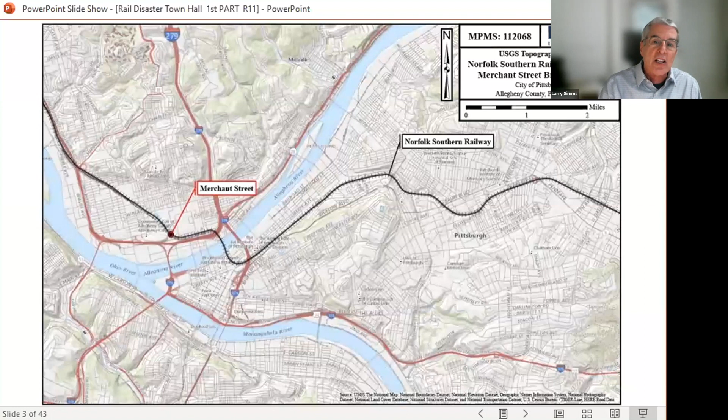Let's look at a rail bridge on the North Shore where the tracks pass over Merchant Street at the southwest corner of Allegheny Commons. The bridge dates from 1905 and was the first bridge in Norfolk Southern's PVCP, the Pittsburgh Vertical Clearance Project, to be rebuilt, completed last year.

This is how the bridge looks today. Here's how it looked 2 years ago.

Remember, this is the Vertical Clearance Project. So an important detail is that the tracks are above the road. There was never a constraint here on railcar height. We've never understood why this was part of the PVCP or why it was implemented before the rest.

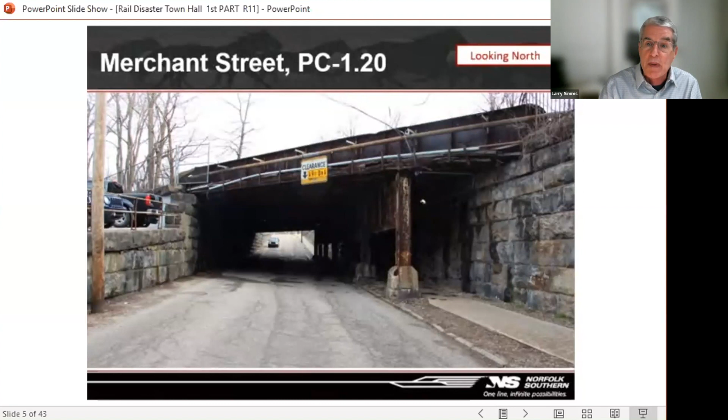In 2018, the railroad hired engineers to assess the bridge, as you see it here, and decide whether it could be saved or must be replaced. Their pictures show a steel structure in advanced decay.

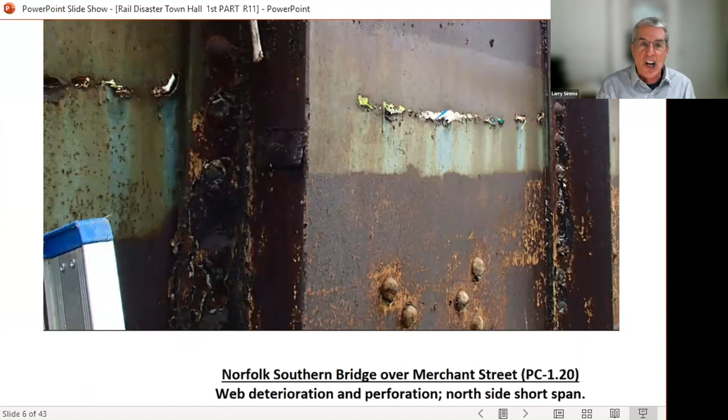The bright spots you see in the plate steel here are daylight shining through holes. This photo shows 100% section loss, which is technical talk for no metal here, can't support any load.

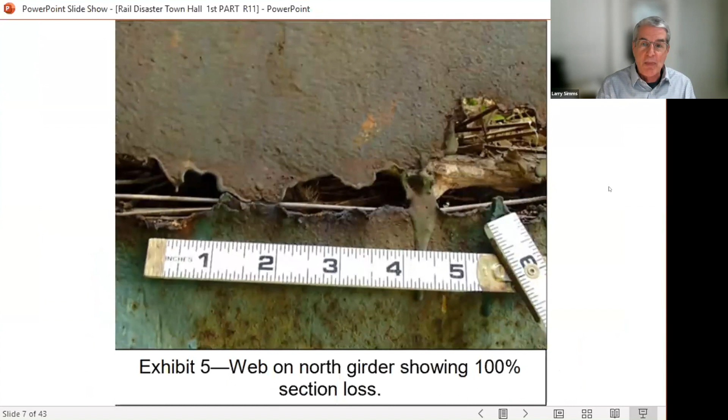When the engineers published their report, we were shocked to see one image in particular. It's not that we were surprised at the bridge condition. We visited the site, but the plain statement of what caused the serious damage was new to us.

It's directly attributed to an accident in 1934. Though neither the railroad nor the engineering company told us, this was no small incident. We've learned that a passenger train belonging to the long-gone Pennsylvania Railroad jumped the track, crashing into the Clark Bar factory and an apartment building below the bridge.

People died. Let's turn the clock back to February 26, 1934. You'll want to use to boost your volume for this clip.

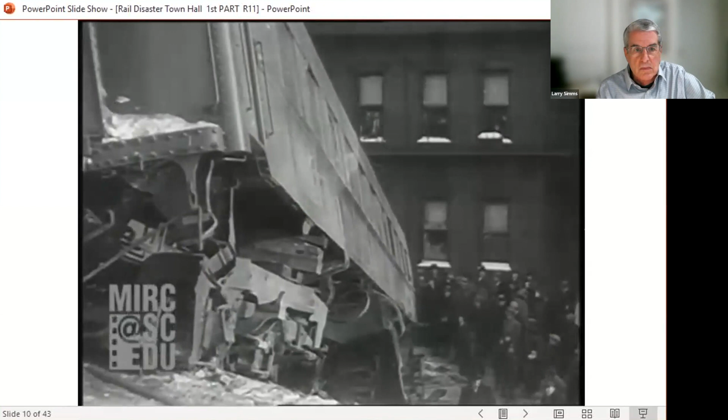Death rides the rail. Smashed cars tell a tragic story of the plunge of an express train from the Pittsburgh viaduct, taking 9 lives and injuring 37. One of the coaches tore into the side of the factory, while others landed near apartment houses, terrifying their occupants. The train, bound from Akron, was just entering the city at night when suddenly it jumped the track. This shows how passengers were crushed in their seats without warning. Only a few minutes away from the next station, their lives were snuffed out in a twinkling. In spite of every safeguard, fate took its toll.

Again, that's the very same bridge we've been looking at. This was national news. Nine died, forty were injured. We don't trivialize the loss of life, the horrific injuries, or the property damage.

Indeed, the potential for such calamity is why we're here. But the most important lesson for us today is that neither this railroad nor its successor, Norfolk Southern, ever saw fit to repair the structural damage, not even to paint the area to prevent further degradation. As we see throughout our region, rail infrastructure is typically allowed to deteriorate until it falls apart. Bridges needn't end this way.

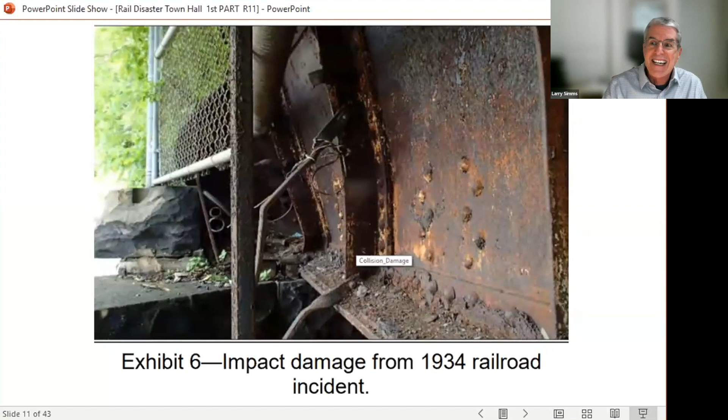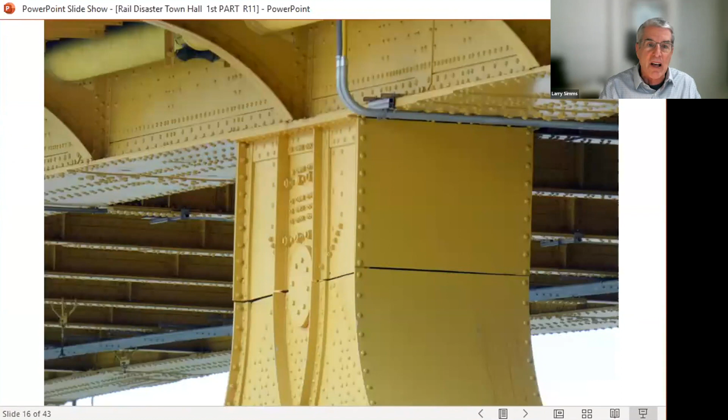We'll take a quick look at two. This is the McCullough Bridge. Most call it 16th Street. It's 99 years old, and the photos tell the story. The city maintains it well. There are no obvious signs of age or wear. It looks like it could easily go another 99 years. It's really in great shape.

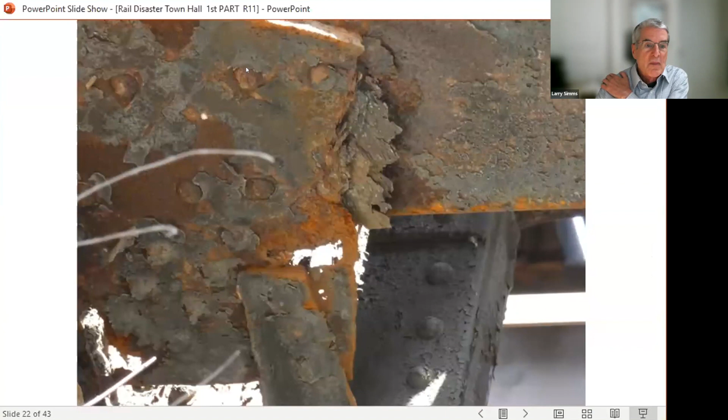There are two types of aging that concern me. The first is the structural steel itself. There are holes, which you can see here, flaking horizontal metal at the base of these beams retains water. It seeps into the cracks. There's little or no protective paint. There are holes at the top here, and holes at the bottom.

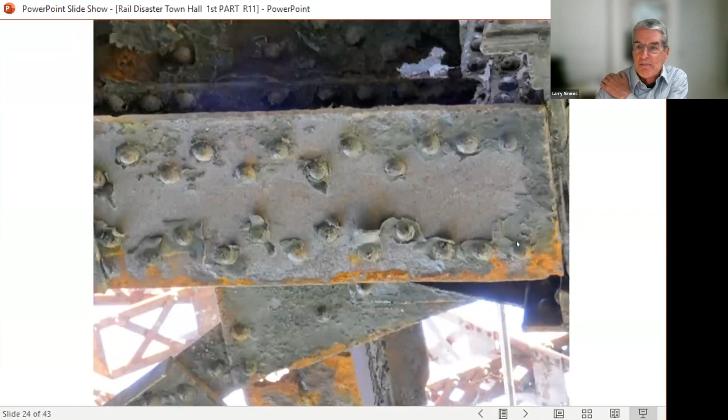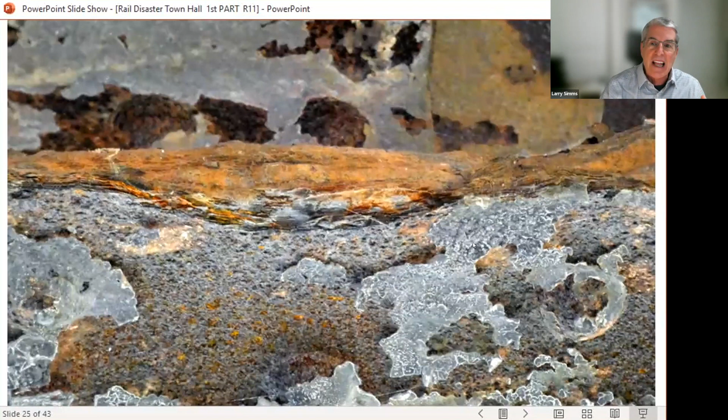This is the worst part. This is the bottom of a beam that has absorbed water, rusted, and it expands as it rusts. It flakes off and loses most of its strength. Some of the decrepit metal looks quite artistic, and these scenes are visible throughout the bridge.

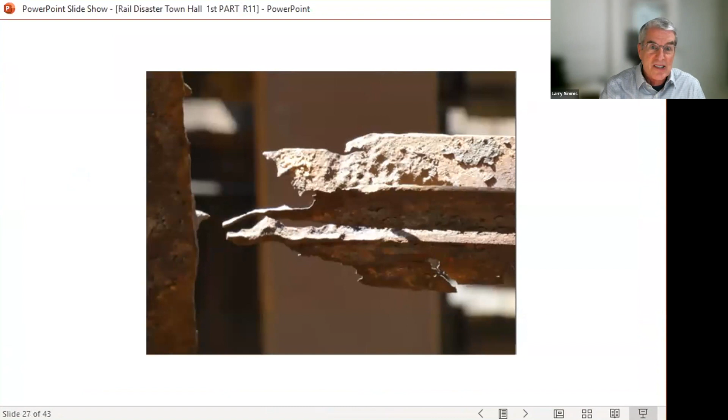This is one of the worst locations. It's directly opposite the convention center. The horizontal steel beams at the bottom of this concrete used to be straight. They're now sagging, and it looks like there's not much strength left in that structure.

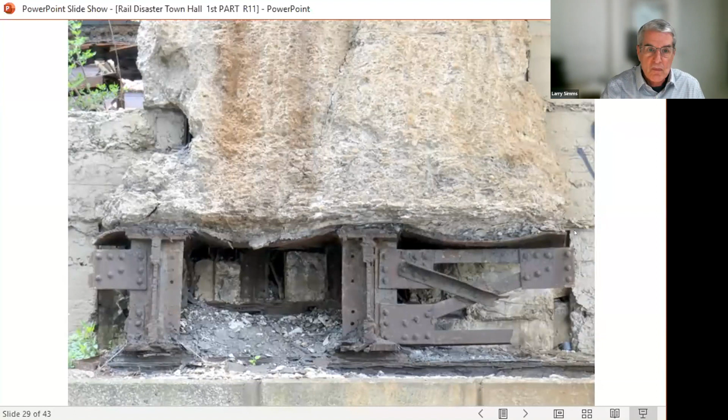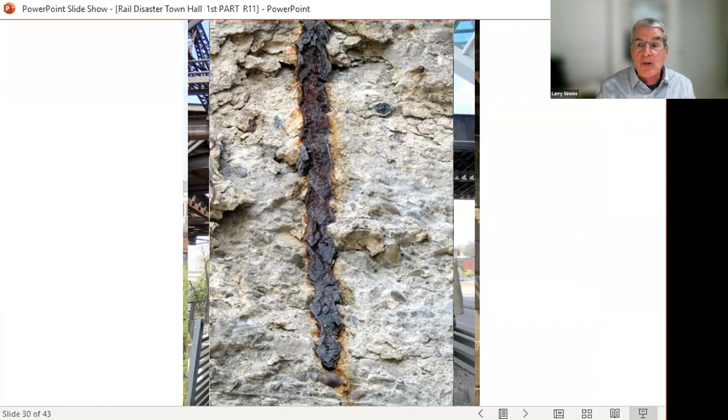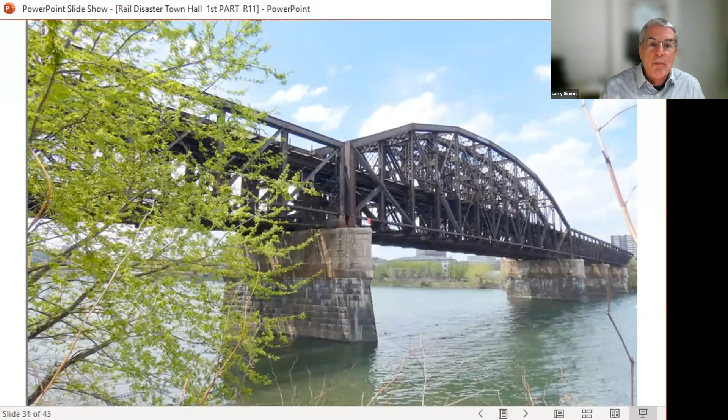The second problem is the concrete support piers. This is one where what used to be wrought iron rebar has disintegrated completely. The original stone piers were built in 1854 and are themselves fine, but the bridge was raised in 1918 by order of the War Department, lifted several feet to allow taller boats to pass. The concrete is in terrible condition. The rebar is just falling apart. There's nothing left. I wouldn't bet on this structure lasting beyond next week.

Back to Merchant Street. The engineers said what we expected them to say. We knew the railroad wanted to replace the bridge, not fix it. They cited extensive steel corrosion and said there were major safety concerns and risk to the traveling public, meaning people walking, cycling, and driving underneath. They also said current and future rail traffic depends on it. On the next page, they confess their real objective: to accommodate the expected substantial increase in freight demand for the next 25 years. Norfolk Southern wanted a new bridge to grow their business, and they wanted taxpayers to cover most of the cost. They needed it because they neglected the old one until it failed, yet the bill was handed to the public.

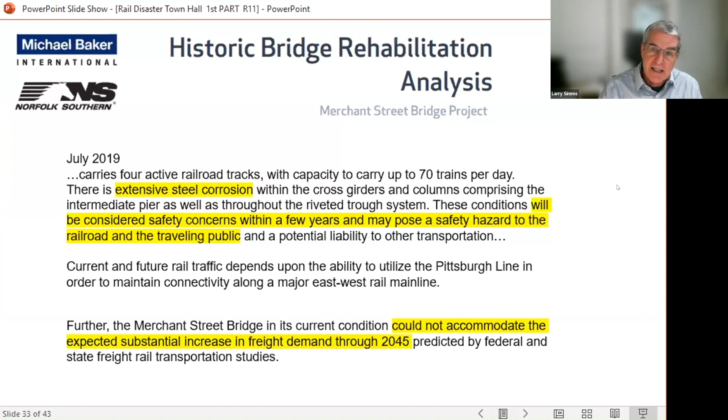One more point about maintenance. The engineers weighing repair versus replace argued that saving the bridge would mean taking care of it, like painting every 20 years, something the city always does and the railroad never does. I used to work for Rust-Oleum on the industrial side and climbed many water towers and walked many bridges, all made of steel. I never met a maintenance head who didn't understand that steel outdoors needs to be protected, or who was bothered by a 20-year painting cycle.

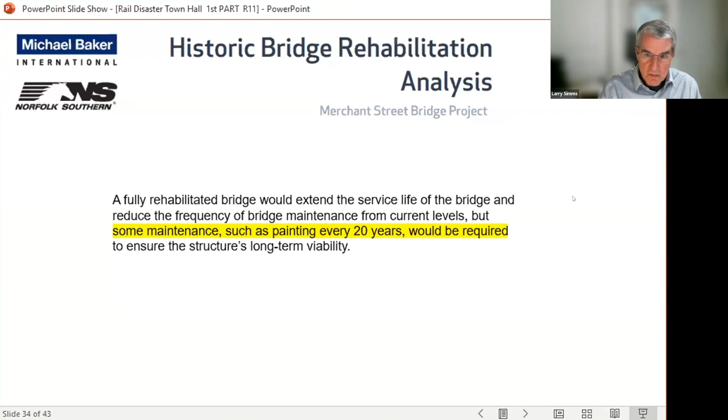I wondered whether Norfolk Southern has so little regard for our city and region that they don't care how decrepit they make us look. Here, the rusted hulk of the Fort Wayne Bridge, just a few feet from the gleaming convention center. The answer is yes. Just last week, a PBS NewsHour featured RP3 on rail safety and focused on Pittsburgh. Asked about maintenance, Norfolk Southern replied, 'Aesthetics do not determine structural integrity.'

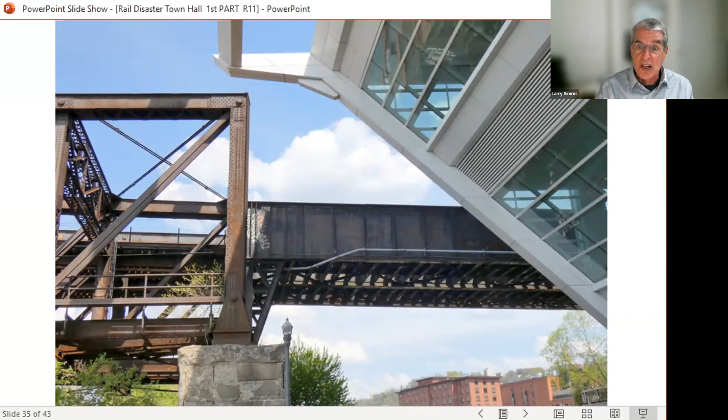So much for appearances. The rail bridges will never look as good as the city bridges. As for structural integrity, if and when Norfolk Southern shares engineering reports which establish and confirm reasonable safety margins, we'll back off this point. They've declined. The real reason the railroad wants to modify Pittsburgh bridges is to accommodate the expected substantial increase in freight demand through 2045.

To be clear, we understand all stakeholders signed off on the vertical clearance project and it's a done deal. That doesn't mean we think it was a good deal or understand why taxpayers funded improvements to make Norfolk Southern, with the existing height constraints, even more profitable.

Norfolk Southern made $1.1 billion profit last quarter alone. We're still allowed to make sure public monies are spent as intended.

We can still observe that the only thing taxpayers will reap from this forced investment are more pollution, more noise, and more risk of an East Palestine event. We can even note that a respected columnist recently called for Governor Shapiro to take back the taxpayer money.

Our reality is that the railroad will soon run more longer trains, taller and inherently less stable, right next to volatile oil trains on a zigzag route through our most densely populated neighborhoods, including the downtown business district and sports arenas.

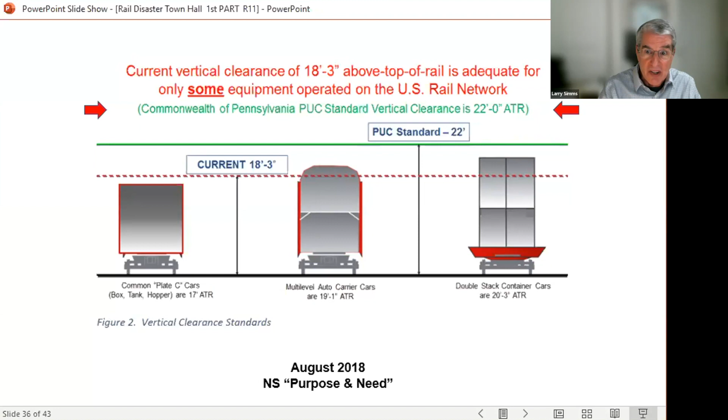We're allowed to continue working to maximize safety and minimize risk, and we'll do so.

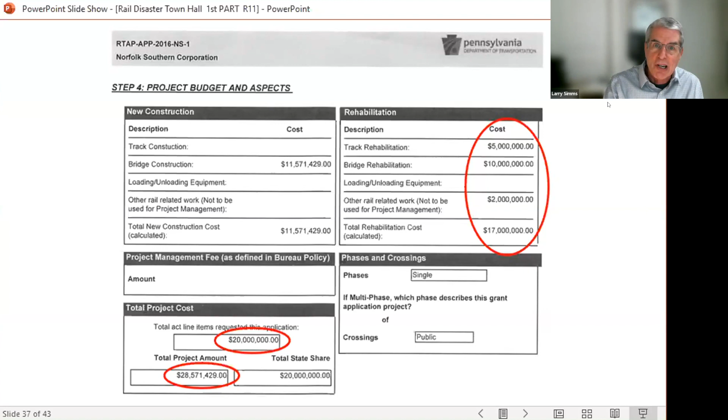$28,571,429 to Norfolk Southern, with $20 million from taxpayers.

My day job is in commercial construction. Half my customers are government agencies, and half those projects are for the Department of Defense. I routinely see bids on far larger, far more complex work. I personally believe this grant followed a different, backwards process.

Hypothetical conversation. Railroad: we'd like funding help on some construction. State: what's it going to cost? Railroad: how much have you got? State: 20 million. Railroad: we'll take it.

How else could a cost projection multiplied by 70% consistently yield a taxpayer share of $20 million to the penny, even as many component costs sharply change?

I don't suggest this was illegal or improper, but if I were Norfolk Southern, I'd sure use a different method. These construction costs are hard to accept at face value.

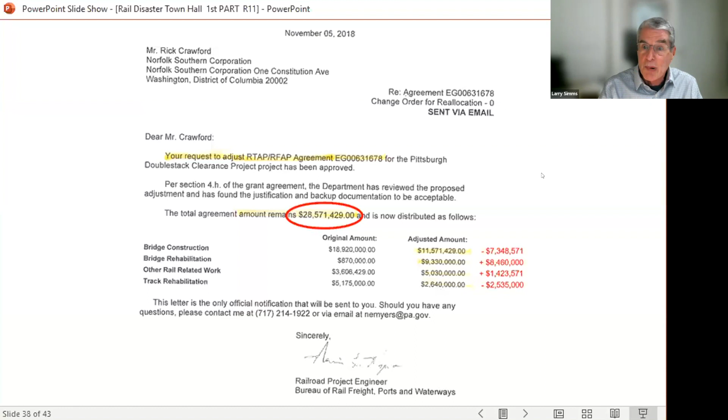That's money problem number one. Money problem number two isn't what you see here. The fact that the new bridge is called maintenance rather than new construction isn't of consequence. But remember that the Merchant Bridge is above the street and therefore has unlimited vertical clearance.

It did not constrain the railroad from running double-stack trains, which makes it impossible to use that argument to justify government funds. Taxpayers are simply buying Norfolk Southern a new bridge for $8.5 million.

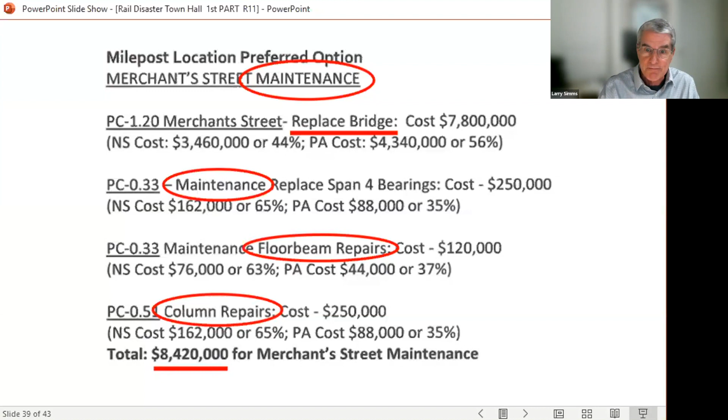Money problem number three. While oversimplified, Norfolk Southern's capital budgeting model looks like this to us. Step one, build a new bridge for $8.5 million, using Merchant Street as an example. Step two, collect a taxpayer subsidy of $5.9 million.

Step three, spend nothing on bridge maintenance for a very long time. 117 years is the actual life of Merchant Street. The net cost of over $20,000 per year is absurdly low.

But worse is steps 4 through 6: do it all again when the last bridge dies of neglect.

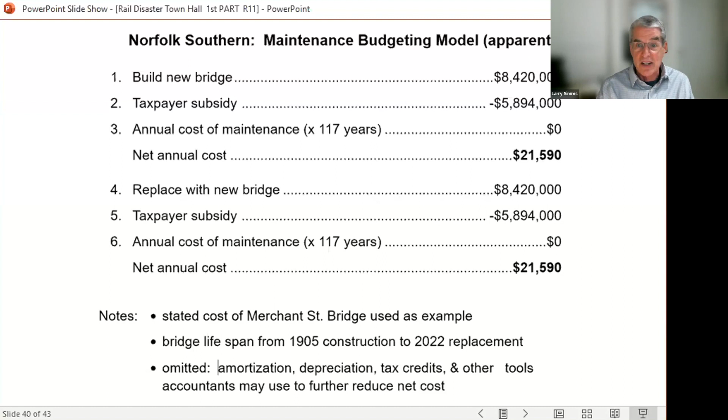The last money problem is that 2 of the approved projects were rejected by local government. The boroughs said no thanks to new structures which were little used, and to avoid future expense, simply told the railroad to demolish them.

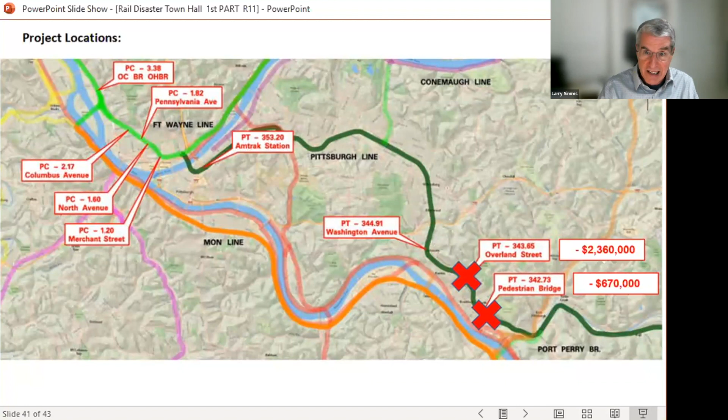Thank you. I'd like to focus on trust and Norfolk Southern's 6-point safety plan when I come back, but now have the pleasure of introducing Glenn Olcerst and Barbara Talerico, who founded RP3.

They've been fighting to hold railroads accountable and to mitigate their negative impacts on our community for more than a decade. Glenn also serves as general counsel for RP3, has scored many notable victories in court, and lately serves as a very effective talking head on TV and radio.